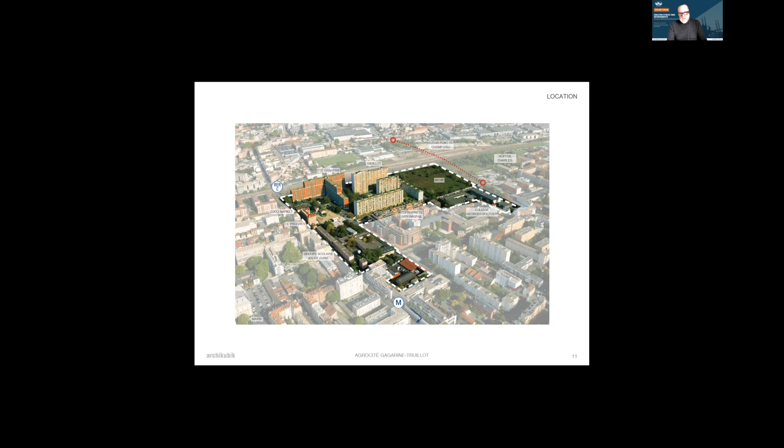The first one is the project's DNA specifically: green as infrastructure. We think it's important that the idea of green, of what is living and alive, be infrastructure as important as trains, rails, or highways.

Our ecosystem for that project was all these people—a lot of people involved in the project, from universities like AgroParisTech, to the University of Engineers for Bridges, other architects, engineers, and environmental engineers.

The first innovation vector is that when we won the competition in 2016, instead of starting drawing, we started talking to the people.

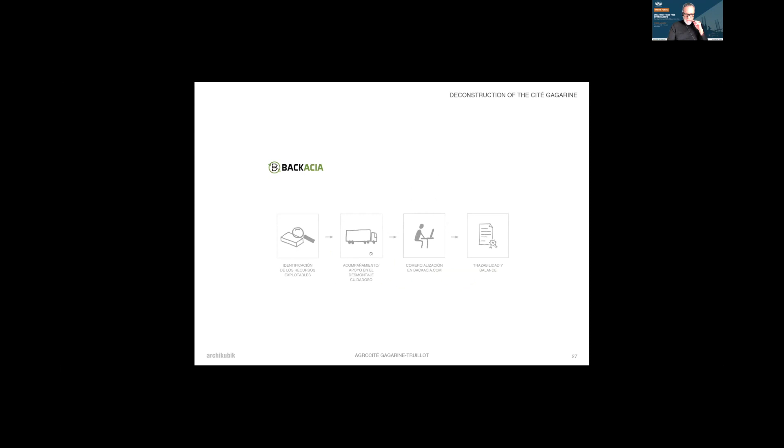And materials like concrete, ceramics, or whatever, we transform into little pieces. We scratch everything and reintroduce it into NeoEco, another circular economy platform. That material at the end serves as sub-base for highways or other raw materials, which permits us to avoid going to natural materials to transform into little stones or whatever. The building became that amount of mountains of raw material for the construction business.

There are some very nice views, because we scratch the building little by little, and this building is in some ways alive all over France. Maybe someone from Normandy bought 2 radiators from the Gagarine Truillot, La Cité Gagarine Truillot, the Gagarine building. So for us, in a metaphorical way, the building spans all over France.

The big point for us was that with that work with inhabitants, we arrived at a third vector too: creating an agro-city. If we have to renaturalize our cities, there are different ways to do it - planting more trees that are oxygen bombs, transforming certain parts of the area into parks. But in this case, it was a very dense part.

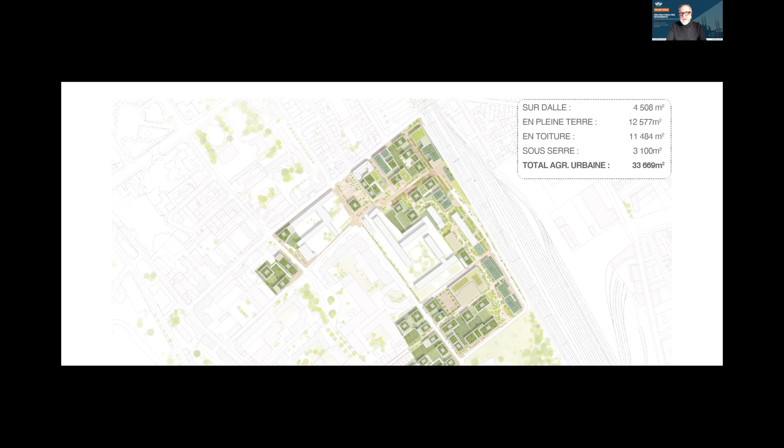Obviously there are parts to walk, promenades, and planting. We're planting a lot of trees. We arrived at 2.5 trees per inhabitant, which the WHO said is the good balance - every inhabitant having about 2.5 trees around.

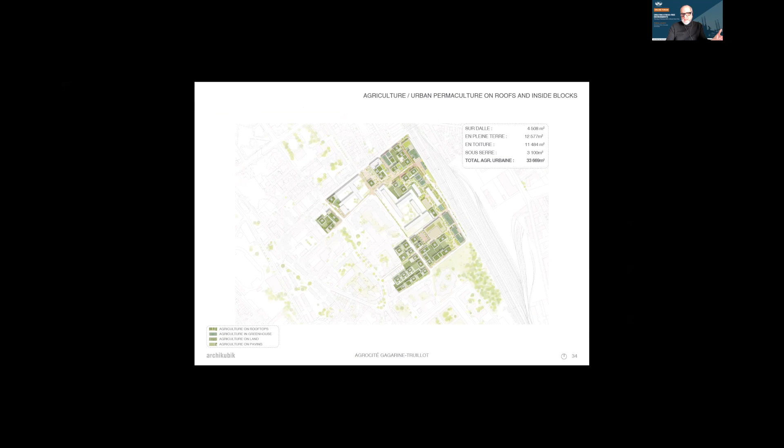Let me get back. This is how we arrived at planning 33,600 square meters of agriculture processes across that whole area of 12 hectares. So there is a lot of soil for planting vegetables and all that stuff.

This is what we call a sensitive, social and cultural high quality environmental standard, with different strategies that come from that idea of the agriculture city. It's like mutualization of circular systems - the organic waste of the inhabitants will serve as nutrients for planting. So there are a lot of benefits for the community, the idea being to build a community around that concept of agriculture city.

And in the same way that we plant vegetables, we plant buildings - that's a metaphorical idea we work with. We also try to create another cycle of carbon sequestration, so: worm compost, low carbon footprint, solidarity economy, co-ownership, etc. So we are always trying to work with cycle systems, an ecosystemic system.

We work a lot with the Agriculture University of Paris on what we can plant there - so we can do hydroponics, planting without soil, growing cuttings, diverse types of garden vegetables, production in pots or flower production, and also saffron, which works very well economically. We can plant in certain parts of the building, on the roofs, or at ground level in the inner block areas. That was one of the images we arrived at.

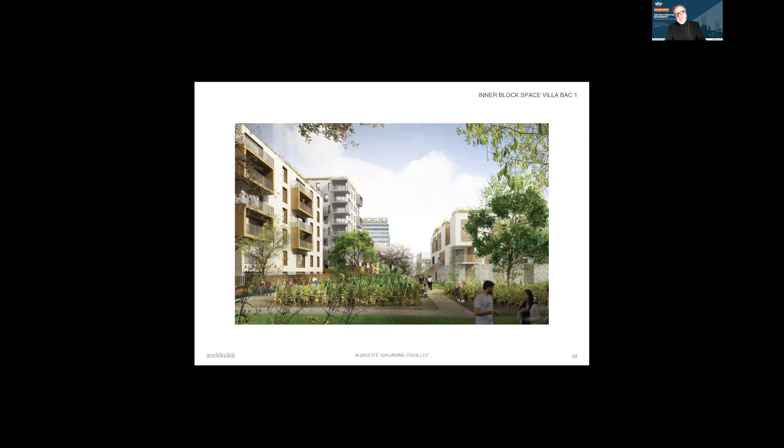So there's a way of involving the community to understand the cycle of what they finally eat in their lives. This is an inner block in the denser area around the zone of the former Cité Gagarine, where we can also plant, and this will be taken care of by that professional company that manages all 3.3 hectares of urban agriculture production.

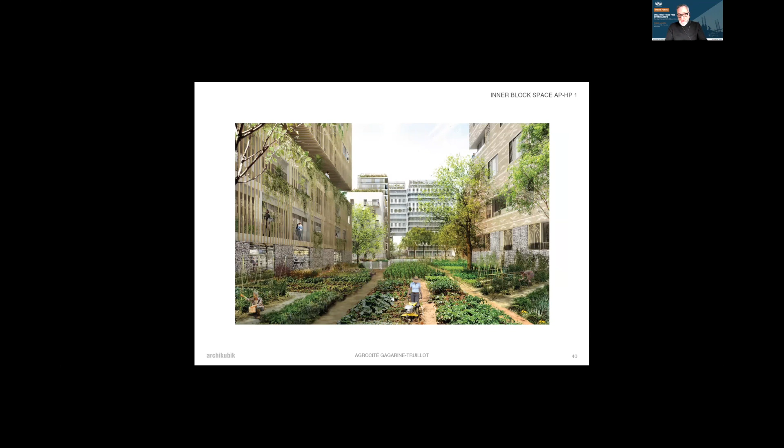Also, there are obviously public spaces. This goes to the center of the city, and this goes to the hospital, so we create a kind of promenade. Some of them are more mineral, and some are very planted, with a very pacified speed limit for cars - mainly cars will arrive right here at 30 kilometers per hour, and we only introduce cars for the neighbors in that part here.

And this is a rail station - there was a little train station here, so the area is very well connected.

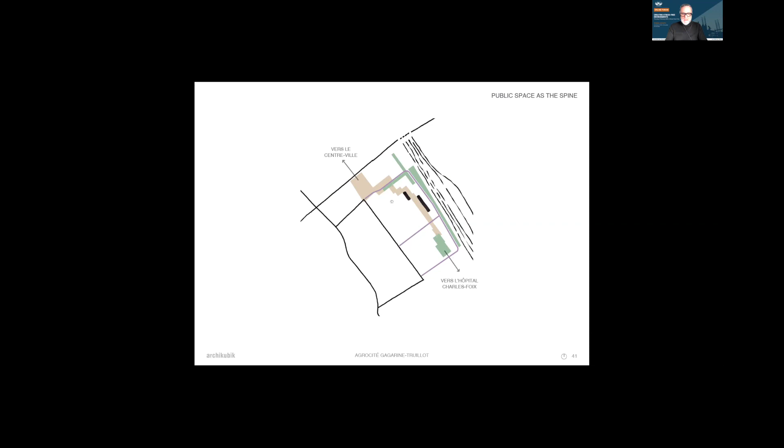And this is the public space - not the productive landscape, but more what we call the little park here, or the promenades. They are car-free all around here, so people can go around and arrive everywhere, to the plaza - the central plaza right here, La Place Pioline, which was one of the community hearts of the urban planning proposal.

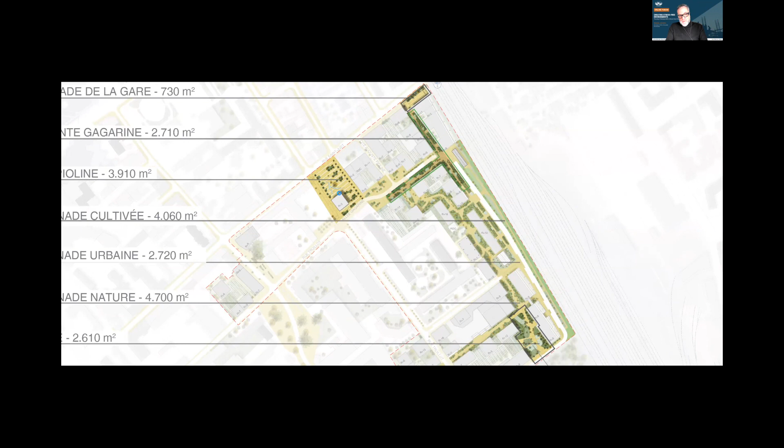And coming back - I know I have 25 minutes, so I'm trying to go very directly to the point.

This is one of the images of the Place Pioline. This is the community part that people can play, the kids can play, or parents. There are going to be bars on the ground floor.

We also try to make people understand that the cycle of water is very important in cities. Water is going to be one of the big problems in the future for all the world, not only in Europe or Africa. So it's very important to make an educative design to help people understand that water is quite important.

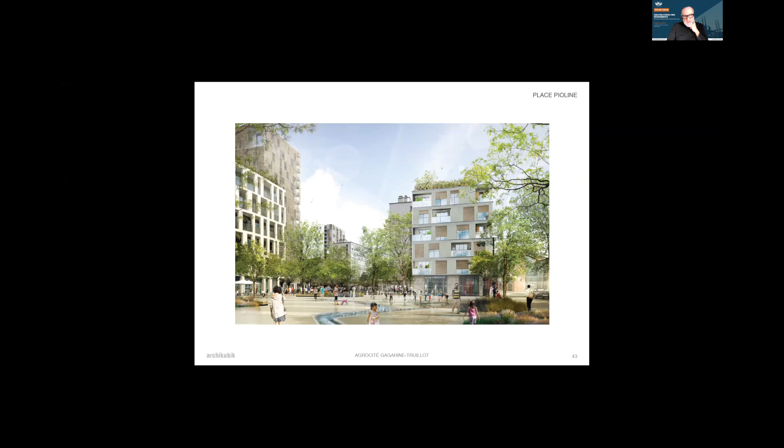Here in that roof, that new building, is going to be part of the planting areas up there, and the inner blocks behind those buildings is the agriculture at the zero level.

The fringe walks, so we have a nature promenade, urban promenade, and a cultivated promenade. There's one greenhouse, just one, that's going to be for the inhabitants. It's the only one that's going to be outside professional agriculture, so they can plant special tomatoes or whatever they want in the greenhouse we place right here.

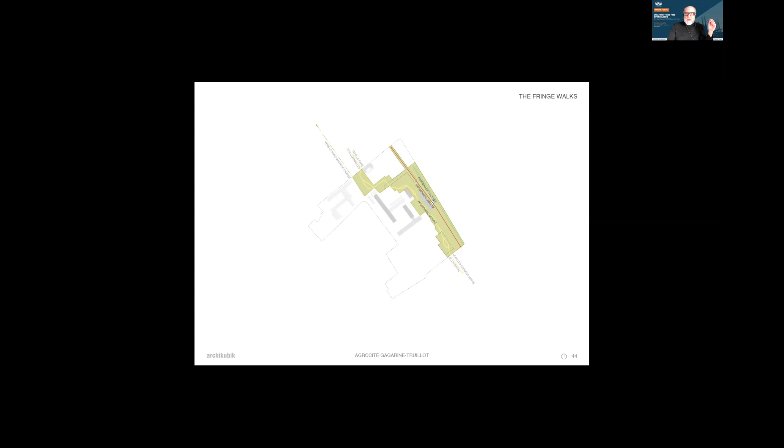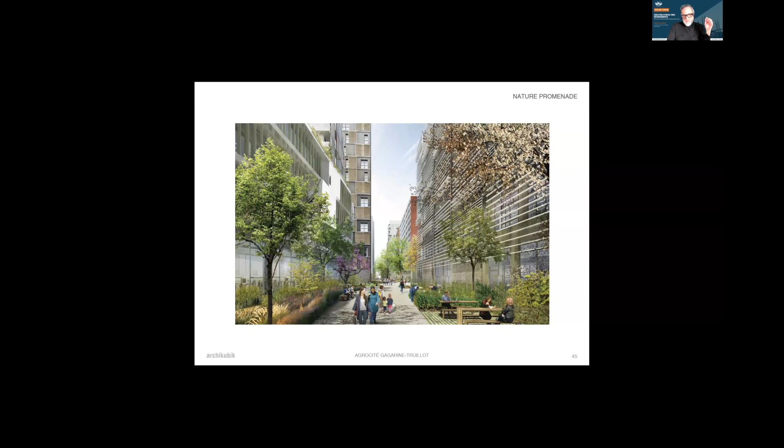From the nature promenade it could look like that - promenades you can walk through. We are trying to minimize the impact of vehicles, with bicycle lanes and such. The standards that we are planning cities with right now are more based on people, not cars.

This is part of the Place Pioline here. On this pavement was the footprint of the old Cité Gagarine that we deconstructed.

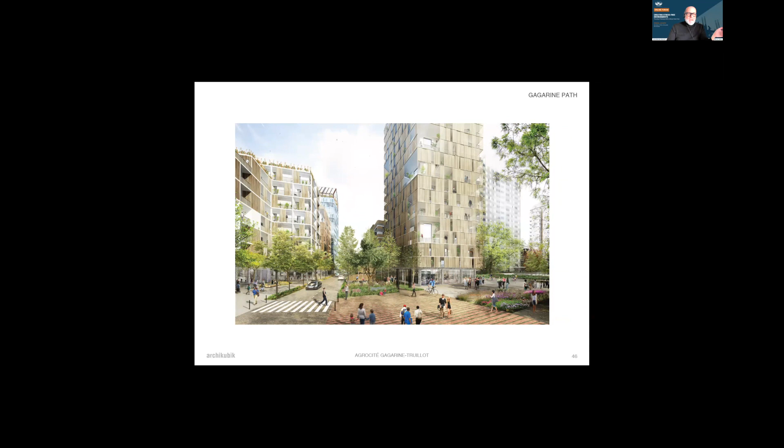We are right now starting the works for plot number 1 and 2. That goes very, very quick and fast in urbanism terms. In urban planning, that plan will be finished in maybe 10 years. We started in 2016, so it's quite important, the time it takes to transform a city.

The last vector that was extremely important is creating that relation of the community. We call it transitional urbanism. Sometimes when we are designing and having meetings with everyone to design parts of the city point by point, nothing happens physically in the area, because everything is on the plans.

In the Cité Gagarine deconstruction, we worked with the municipal art gallery that was there. From block A of the Gagarine, there were 50 apartments given to local artists in the area. They could do anything they wanted, make installations or whatever. During 15 days in July 2021, there was a big opening of that pop-up gallery in the building, to show and transform that into a catalog called the Voyage Gagarine.